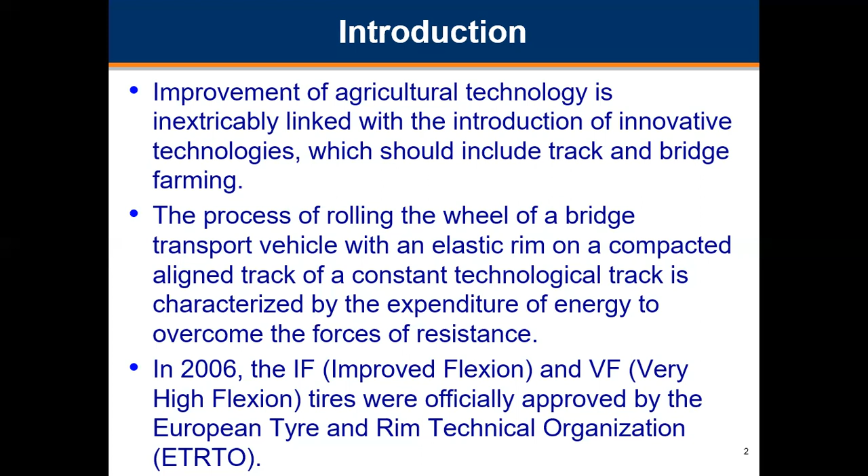In 2006, the IF, also called improved flexion, and VF, very high flexion, tires were officially approved by the European Tyre and Rim Technical Organization. Today, IF and VF tires are produced by world-known brands of agricultural tires such as Michelin, Firestone, Goodyear, etc. Such tires have a number of advantages, in particular rolling resistance, up to 20% more tangential traction force at the same slip, and so on.

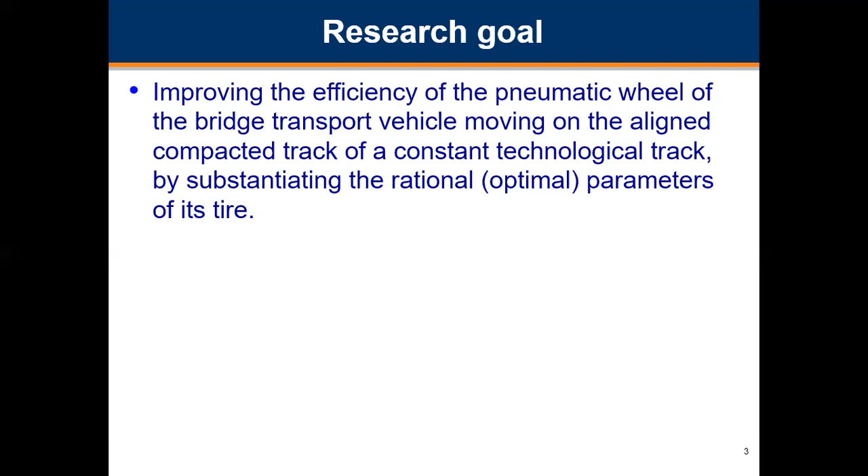The research goal of the paper is improving the efficiency of the pneumatic wheel of the bridge transport vehicle moving on the aligned compacted track of a constant technological track by substantiating the rational optimal parameters of its tire. A physical object of research was a bridge vehicle developed by our construction team, shown on Figure 1.

With a track width of 3.5 meters, the specified vehicle contains a power truss 1, which is a frame rigidly connected to the left 2 and right 3 platforms. Brackets 4 with wheels 5 are attached to platforms 2 and 3. The rotation of the wheels 5 is carried out by means of two motor reducers 6 installed in the middle of platforms 2 and 3 and synchronous mechanisms 7 driving the front and rear wheels 5 from each side.

In the upper part of the left platform 2, there is a block cabinet 8 with chassis control devices. Between the front and rear wheels 5 on the lower surface of platforms 2 and 3, there are support legs of power jacks 9 for lifting the sides of the vehicle from either side when it turns.

On the crossbars of the power truss 1, additional units of the hydraulic system of the vehicle were placed, in particular a tank 10 for hydraulic fluid, an electric motor 11 driving the hydraulic pump 12, and hydraulic directional control valve 13. Also, in the central part of the vehicle, there is a hydraulic linkage 14, which is borrowed from a serial wheel tractor. Agricultural machines and implements are coupled with the vehicle by means of the hitch 14.

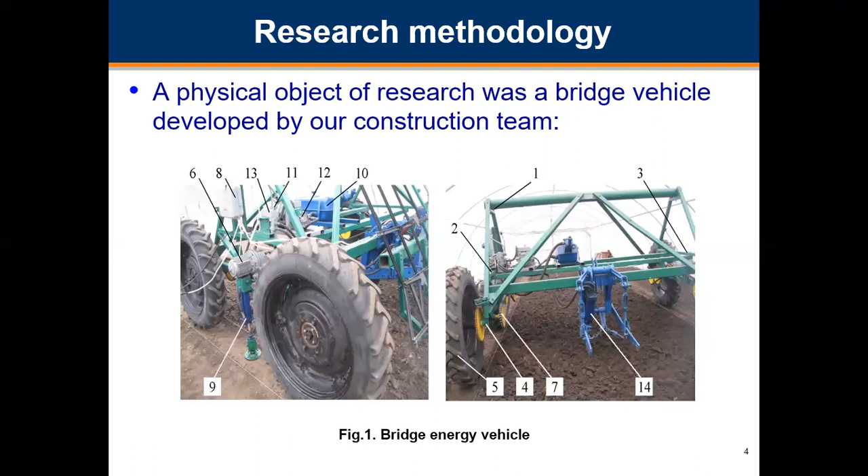As a criterion for the efficiency of the pneumatic wheel of the bridge transport energy vehicle, the traction coefficient of the wheel was taken, which can be determined by the dependence known from the theory of traction, shown on Figure 1, where delta is the wheel slip coefficient, Fr the rolling resistance of the pneumatic wheel, Fk the tangential force of traction created by the pneumatic wheel.

According to the goal of developing methodology for the selection of optimal parameters of pneumatic tires of wheels of bridge transport power vehicles, moving along the tracks of constant technological track with a constant vertical load action on the wheel, it is necessary to find a compromise solution by solving the equation of the form shown on Figure 2, where D0 is static tire diameter, B0 is tire width, PW air pressure in the tire.

Finding the extremum of parameters of a bridge transport vehicle tire by solving the partial derivatives of picture 2 of the efficiency function at constant load acting on the tire allows us to determine the minimum tire width B0, the optimal diameter D0, and its air pressure Pw at which the value of ηk will be maximum.

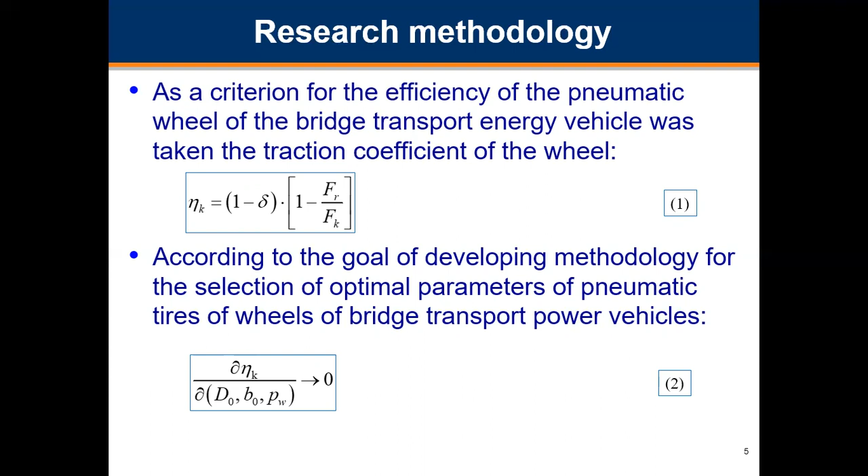In the process of experimental studies, the rolling resistance force of the wheel of a transport vehicle on the traces of a constant technological track was determined by the principle of free movement on the supporting surface. The specified free movement of the vehicle along the traces of the permanent technological track was carried out by its forced movement with the help of a traction mechanism shown in figure 2.

The laboratory complex consisted of a bridge transport vehicle 1, the wheels of which freely rolled along the formed track 2 of the permanent technological track. The free movement of the transport vehicle 1 along the track 2 of the permanent tram lines was carried out with the help of the traction mechanism 3, the cable 4 of which was attached to it. The amount of force that was applied to the free movement of the transport vehicle 1 on the tracks 2 of the permanent technological track was recorded on the scale of the dynamometer 5.

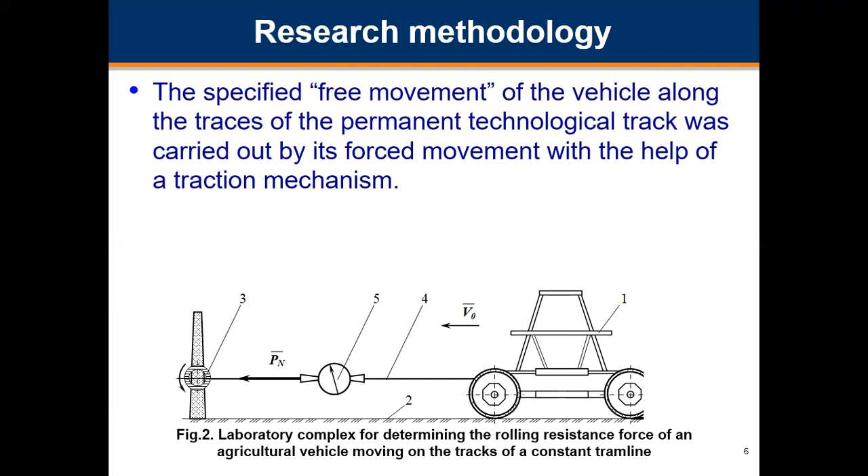Revolutions of one of the driving wheels of the transport vehicle were recorded using a special device containing two reed sensors shown in figure 3. The angular velocity of the drive wheel on the transport vehicle was found from the expression equation 4, where Nk, number of transport vehicle wheel revolutions, s-1, was determined as follows, where Nik is the total number of pulses received from the wheel sensor of the drive wheels of the vehicle for the time tik. Considering picture 5, the operation speed of the vehicle was determined at picture 6.

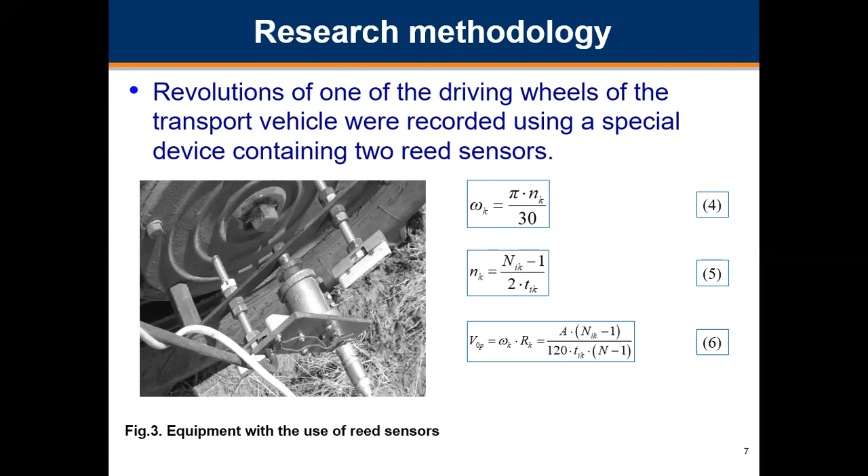To carry out theoretical studies on a pneumatic wheeled propulsor of a bridge transport vehicle, which moves along the horizontal compacted deformed bearing surface of the cell track of a constant technological track, we presented it in the form of an equivalent scheme on which we reflect the forces acting on it, as shown in figure 4.

At uniform rolling of the elastic tire of a bridge transport vehicle on a horizontal deformed bearing surface of a constant technological track, energy transferred to the wheel is spent for three types of work. These works make up the total rolling resistance energy of the wheel of the bridge transport vehicle: vertical crushing of the soil, elastic deformation of the tire causing internal friction in the tire, and friction of the tire tread against the supporting surface at the point of contact. The balance equation of rolling resistance forces of the wheel of the bridge transport vehicle, in this case, can be written in the following form, equation 9.

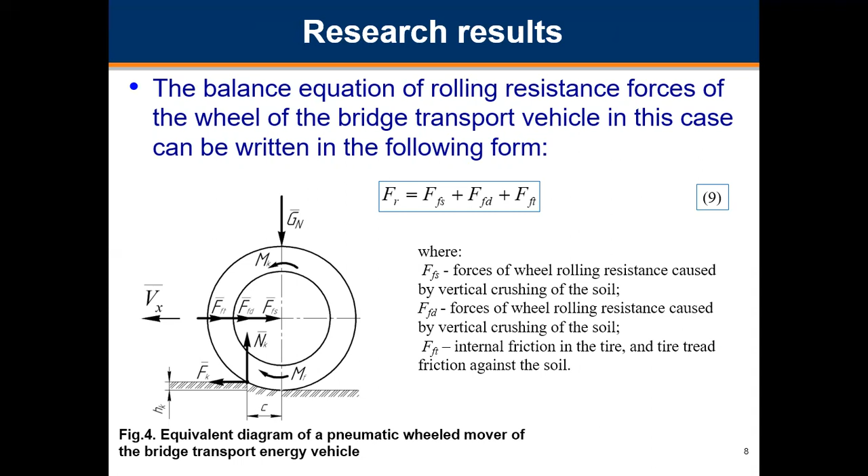The search for a rational optimum D0 showed that the value of the outside diameter of the wheel tire of the bridge power vehicle should be 1.245 meters. The resulting value is taken as the base value of its wheel diameter in further calculations.

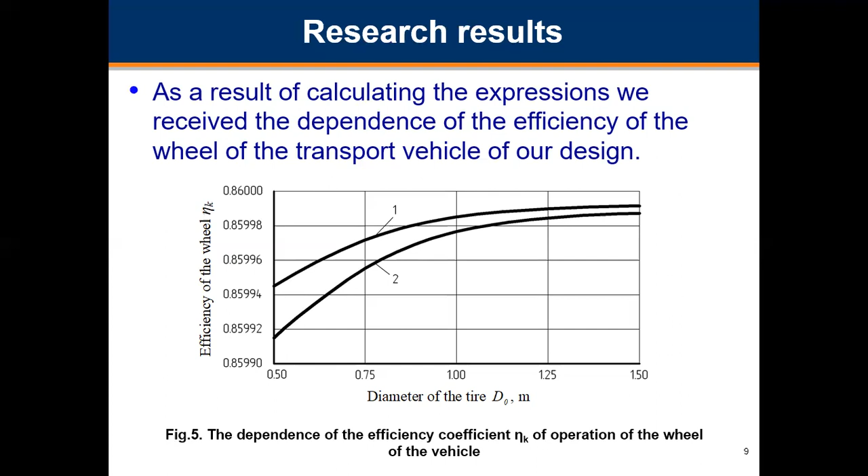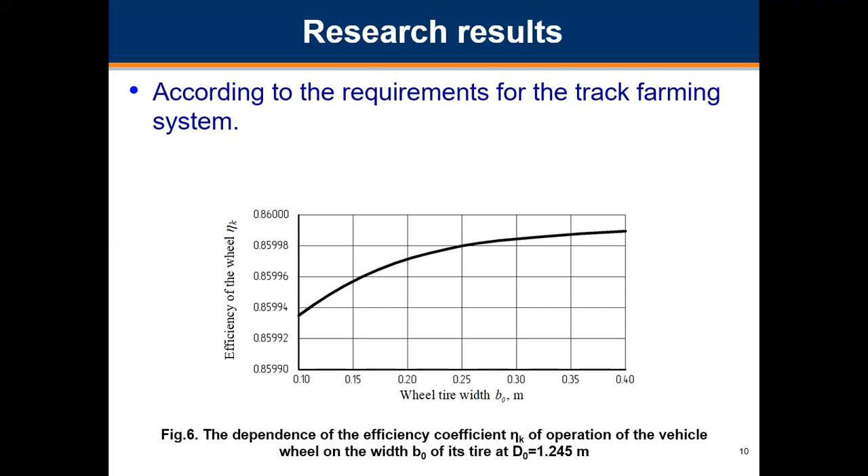As a result of this research, it was found that when justifying the parameters of tires of wheels of bridge transport vehicles, which move on the traces of a constant technological track, it is necessary to solve a compromise problem. According to it, on the one hand, the width of the tire profile of the power vehicle should be as small as possible, and on the other, the wheel has, in this case, to develop the maximum efficiency of its work. The solution of this problem by analyzing partial derivatives of the coefficient of efficiency function of the wheel of a bridge transport vehicle allows to find points of rational optimums of its pneumatic tire parameters effectively and efficiently.

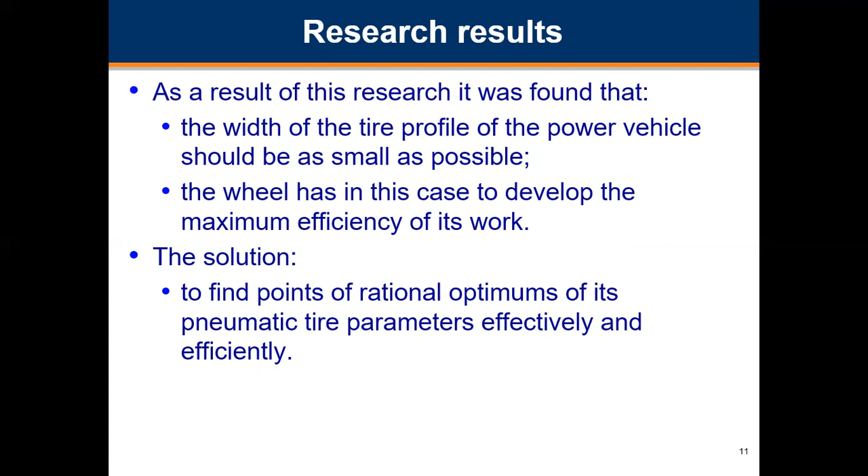The studies have proved that when selecting the size of the tire for bridge transport vehicles, we should be guided first by the choice of its width and then consider its carrying capacity, its diameter. Studying the rational parameters of pneumatic wheels for bridge transport vehicles has shown that the zone of rational optimum of its tire width falls on the interval 0.20 to 0.30 meters and its diameter 0.90 to 1.25 meters, and that increase of air pressure in the wheel tire from 100 kilopascal to 160 kilopascal increases the wheel coefficient of efficiency.

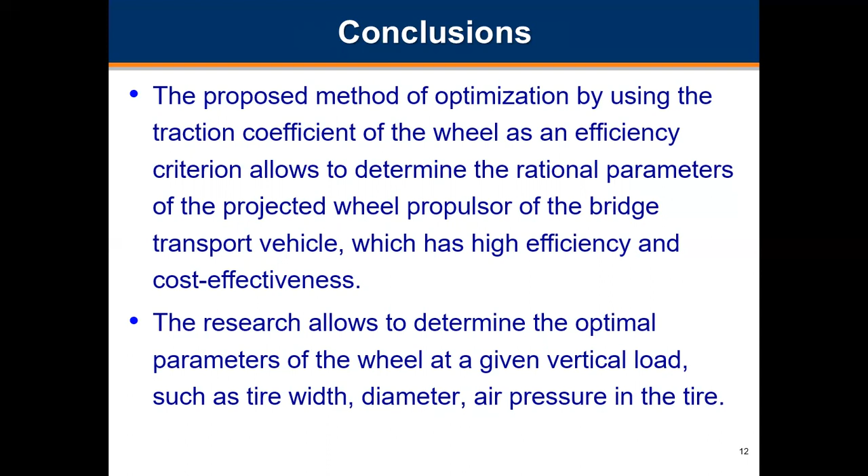The proposed method of optimization by using the traction coefficient of the wheel as an efficiency criterion allows to determine the rational parameters of the projected wheel propulsor of the bridge transport vehicle, which has high efficiency and cost effectiveness. The research allowed to determine the optimal parameters of the wheel at a given vertical load, such as tire width, diameter, air pressure in the tire, at which the drive wheel has the maximum efficiency, or to solve the reverse problem for given dimensions of the wheel to determine the optimal weight load acting on it.

The conducted studies have established that when selecting the size of the tire for the bridge transport vehicle, first you should be guided by the choice of its width, the value of which, from the perspective of the minimum width of the permanent technological track, should be as small as possible, and then by its diameter, based on its carrying capacity. Calculations show that according to the criterion of maximum efficiency of the wheel of the bridge transport vehicle developed by our construction, the rational optimum of the main parameters of its tire wheels falls on the size of the diameter of 1.245 meters and a width of 0.250 meters.

Practical realization of the specified parameters corresponds to the tire size 9.5 R32, the coefficient of performance of which is equal to 0.86. The relatively low value of efficiency is explained by its tractor affiliation. Therefore, justification of parameters of a new tire, specifically designed for overhead transport vehicles which move on the track of a constant technological track, is the subject of separate further research.